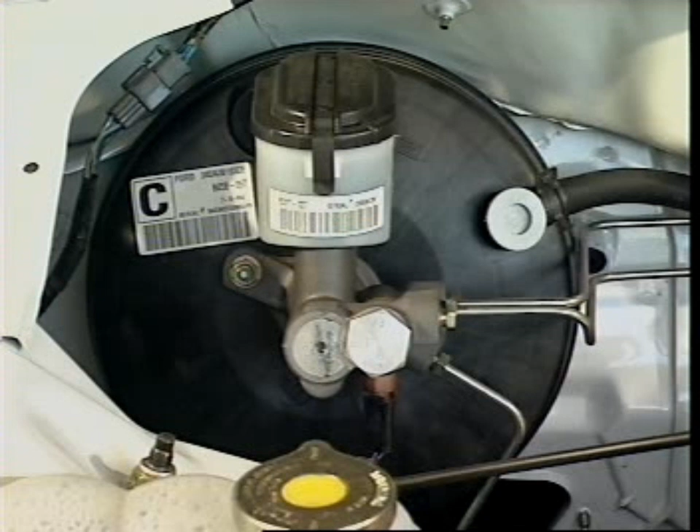This section examines the power booster.

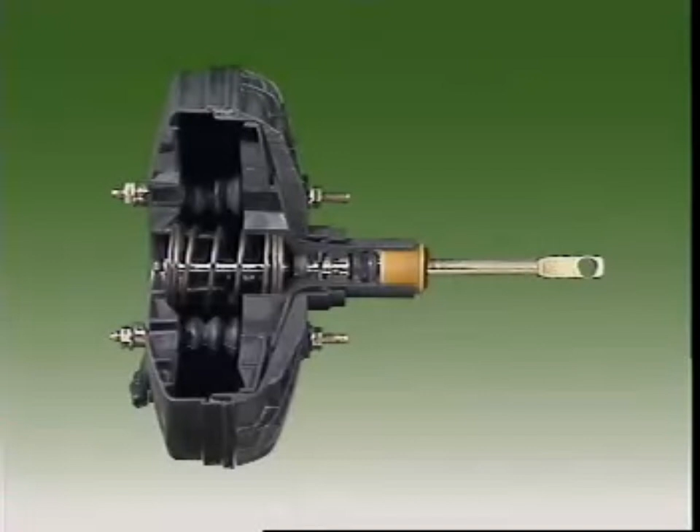A power booster or power brake unit uses a vacuum to multiply the driver's pedal effort and apply that to the master cylinder. This increases the pressures available from the master cylinder.

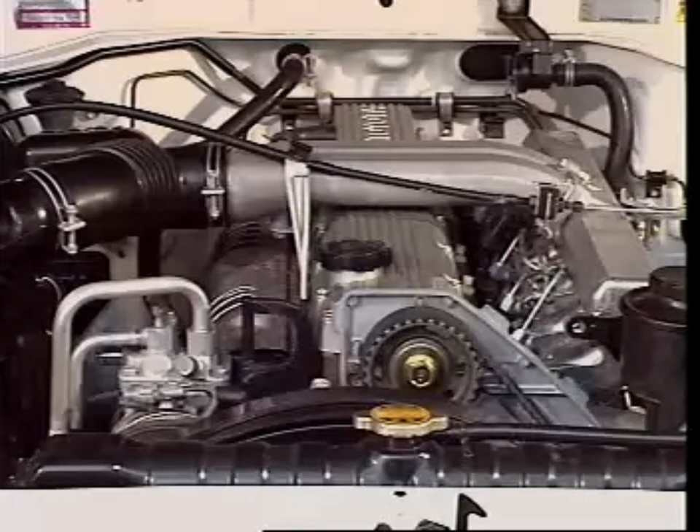Units on petrol engines use the vacuum produced in the intake manifold. Vehicles with diesel engines cannot use manifold vacuum, so they are fitted with an engine-driven vacuum pump.

The most common booster now operates between the brake pedal and master cylinder. It increases the force that acts on the master cylinder.

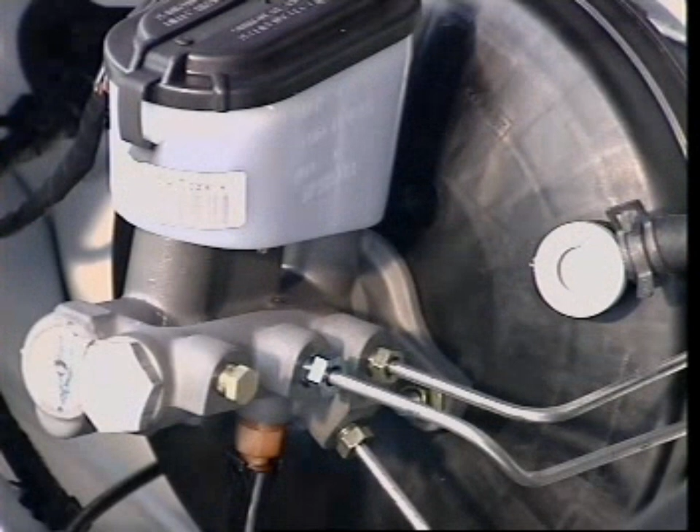Whenever the pedal is depressed, the power brake unit assists the driver. The level of assistance depends on the pressure applied.

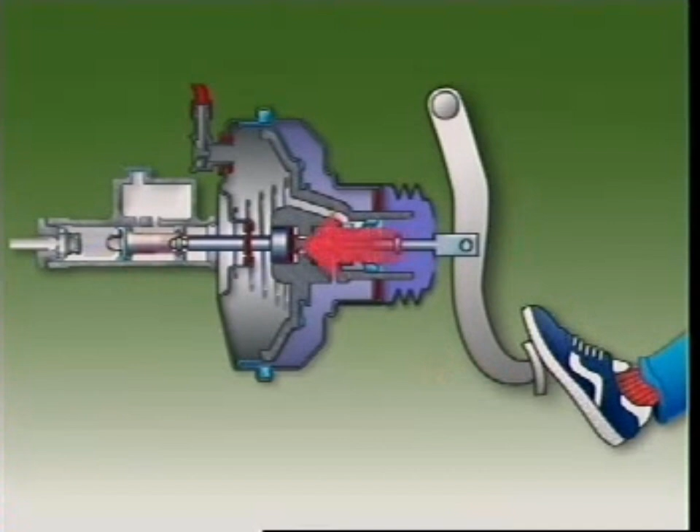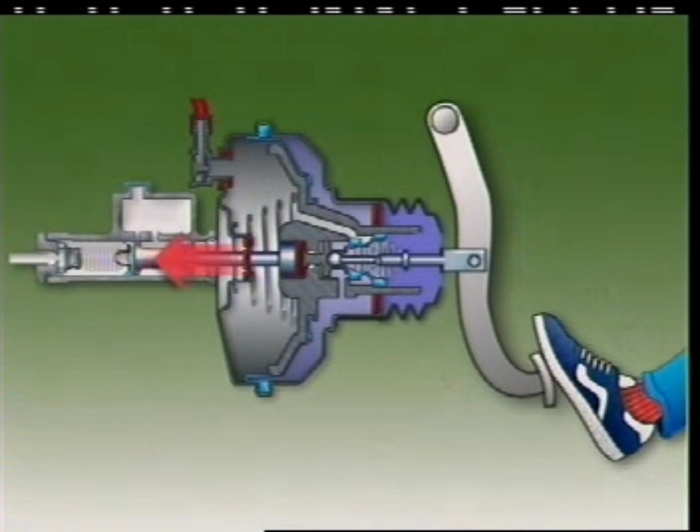When the driver moves the brake pedal pushrod, it transmits movement through the power unit to the master cylinder piston to apply the brakes.

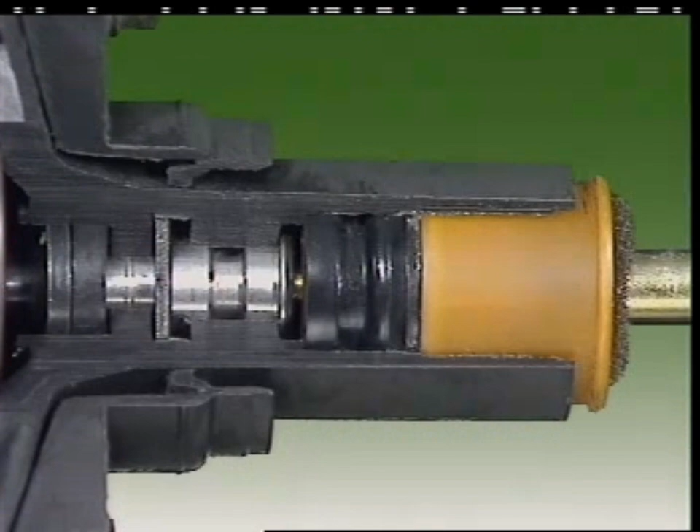It also operates a control valve that admits air at atmospheric pressure to the rear of the unit. How it works depends on the position of the pushrod.

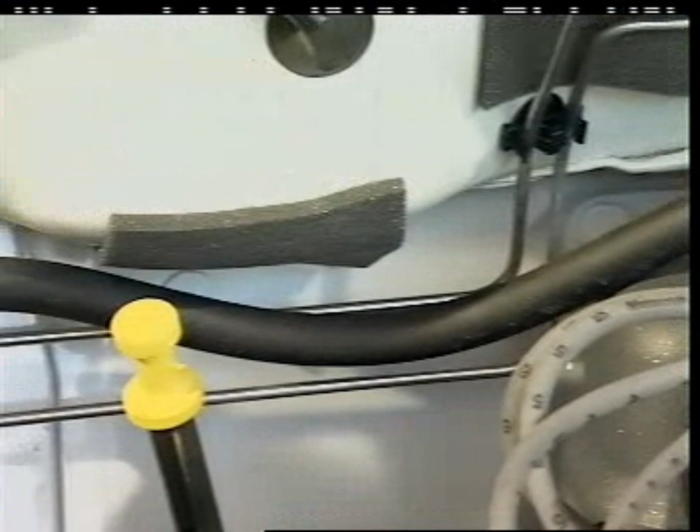A hose connects the intake manifold to a vacuum check valve on the power unit. With the engine running, the vacuum in the intake manifold is used to evacuate the power unit.

This valve is held off its seat and a vacuum is produced in both chambers of the unit. The chambers are separated by a flexible rubber diaphragm attached to the diaphragm plate.

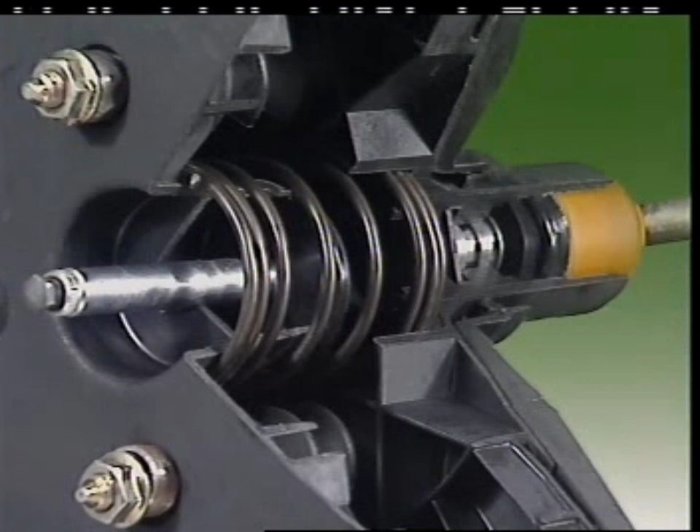It is held in the off position by a diaphragm return spring. The master cylinder pushrod and the control valve assembly are centrally located on each side of the plate.

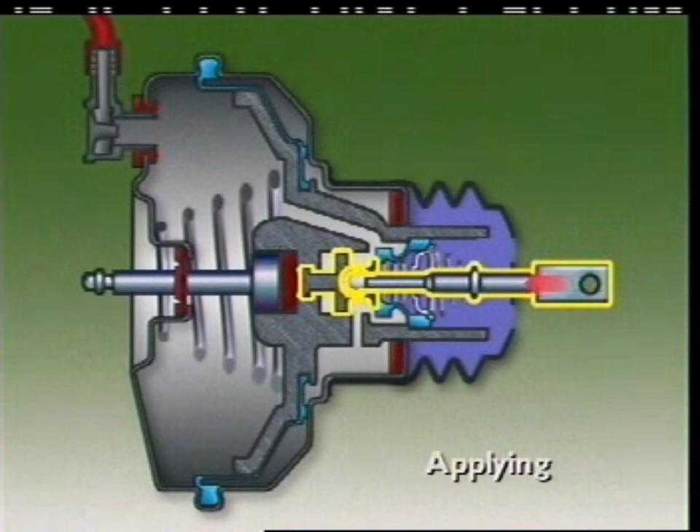As the brakes are applied, the pedal pushrod and plunger move forward in the diaphragm plate. This brings the control valve into contact with the vacuum port seat. It closes the vacuum port, sealing off the passage connecting the chambers.

Further movement of the pushrod and plunger moves the air valve away from the control valve to open the atmospheric port. Air at atmospheric pressure comes in through the air filter and passages and enters the chamber at the rear of the diaphragm.

The difference in pressure now on both sides of the diaphragm moves the diaphragm plate forward, and it takes the master cylinder pushrod with it.

Hydraulic pressure builds up in the brake system to operate the brakes. As pressure rises, a counterforce acts through the master cylinder pushrod and the reaction disc.

This counterforce acts against the plunger and pedal pushrod. It tends to move the plunger slightly to the rear, and it closes off the atmospheric port.

If the vacuum source is interrupted, then, as the pedal is pushed down, the pedal pushrod and plunger assembly come in contact with the reaction disc.

This forces the master cylinder pushrod forward to operate the brakes. The pedal force needed then is much greater than with vacuum assistance.

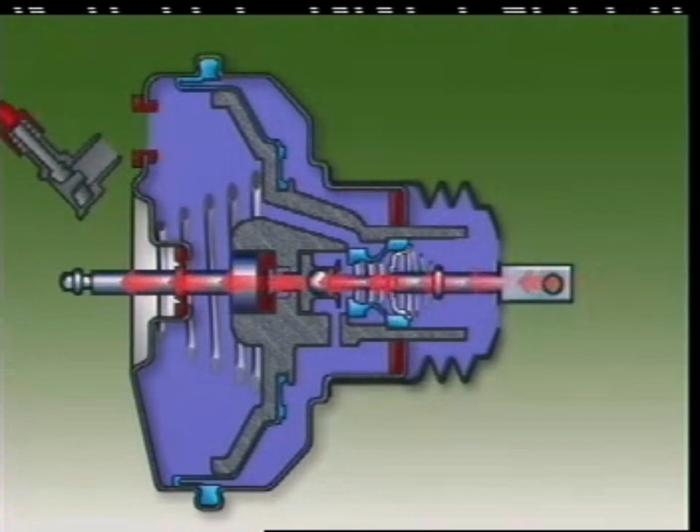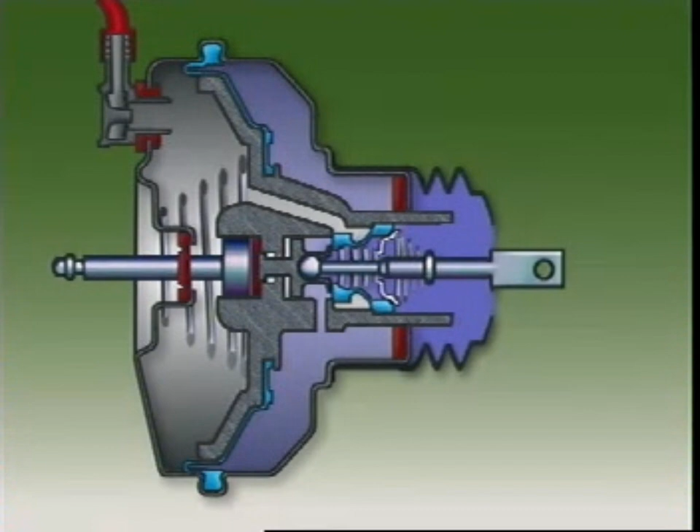During application, the reaction force against the valve plunger works against the driver to close the atmospheric port. With both the atmospheric and the vacuum ports closed, the power unit is in a holding position.

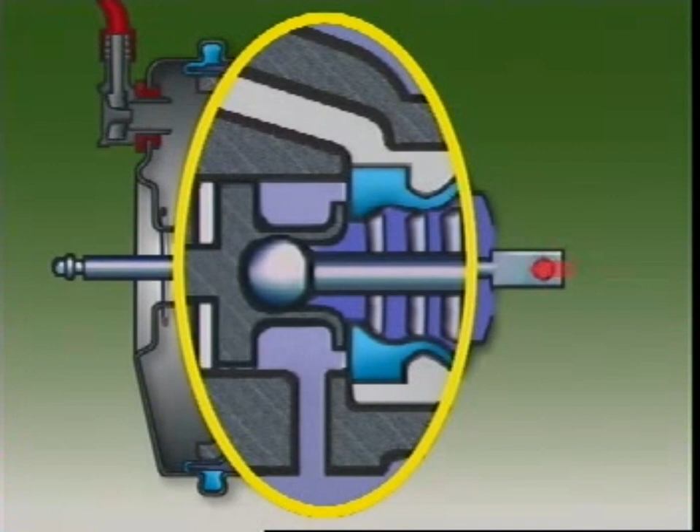It stays this way until increased pedal force reopens the atmospheric port, or a drop in pedal force reopens the vacuum port.